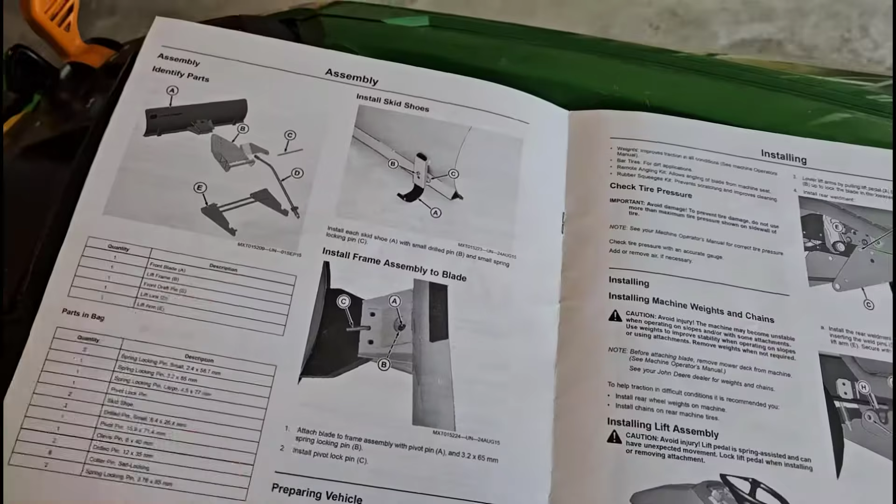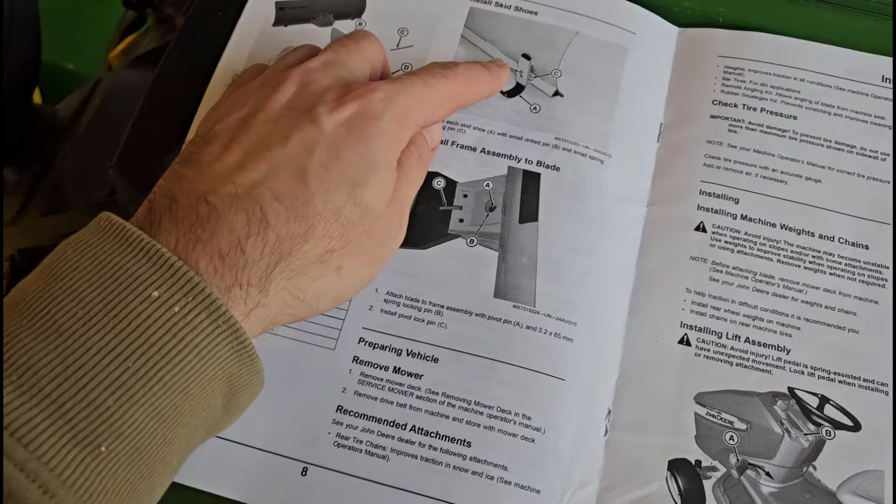Now, throughout this video, I will try to show you the corresponding steps in the manual because sometimes these grainy black and white pictures can be kind of hard to see what's going on. I will note that there are some preliminary steps for the first ever setup and installation that I have already done because I reinstall this every year now. So I'm not going to be showing in this video the steps for installing the skid shoes and installing the frame assembly to blade. You can see I've already done that here.

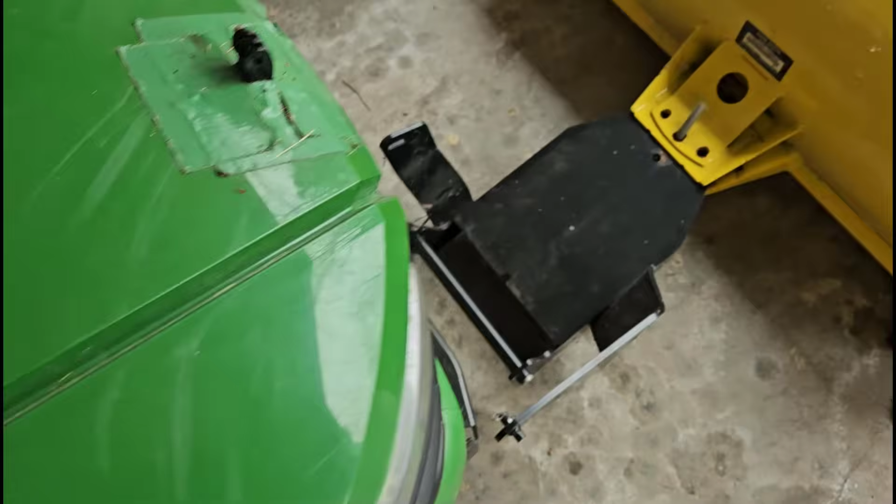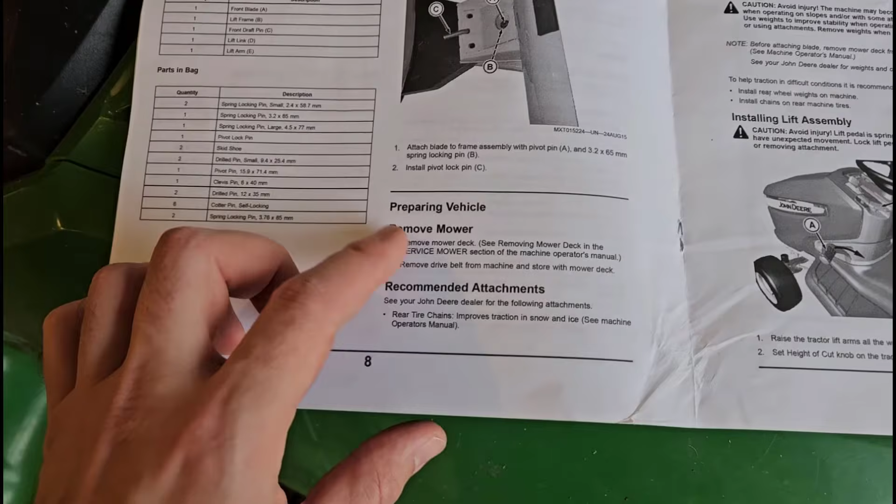And I have also already removed the mower deck. You can see that sitting over there. I have another video on my channel that shows the process of taking that deck off. So if you need to do that first, go check out the link in the description for that video.

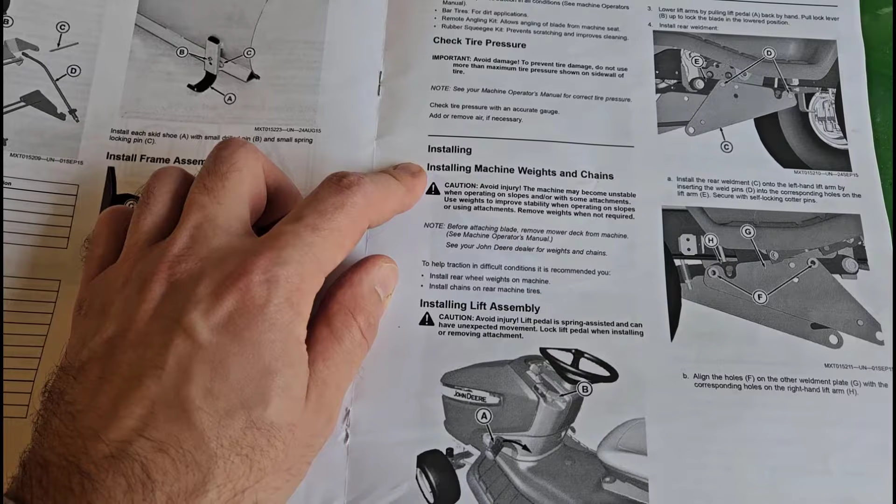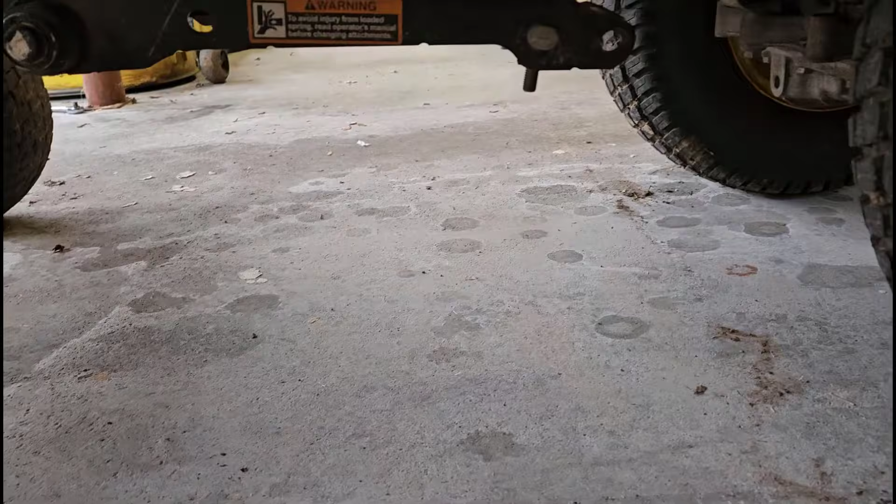Here, we're going to get started with the section of the manual for installing the blade itself. Again, we're going to skip tire chains and weights and get right to the part about installing the blade. So, step one, we're going to raise the tractor lift arms all the way up and set the cut knob on the tractor to the lowest position. So the lift arms, these black things under here, when you push down on this pedal, that's going to lift those up. When you pull back on the pedal, it's going to put them down. So you're going to push on the pedal to lift those all the way up.

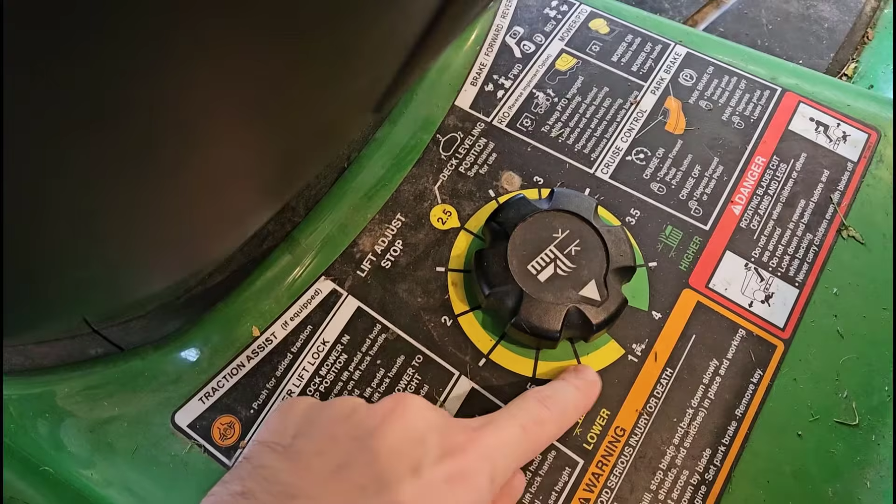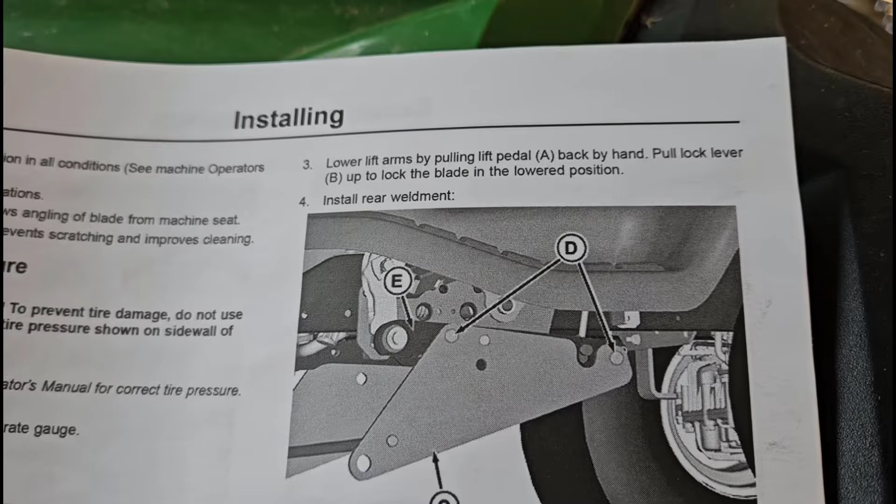Make sure your lift knob is set to the lowest position, which if you just removed the mower deck is probably already done. And then lower the lift arms by pulling the pedal back by hand and then pull the lock lever to lock the blade in the lowered position. So now I'm going to pull this pedal back by hand, and again that is going to lower the lift arms, so pull the pedal back, lower those, and then pull the lock to lock them in the lowered position.

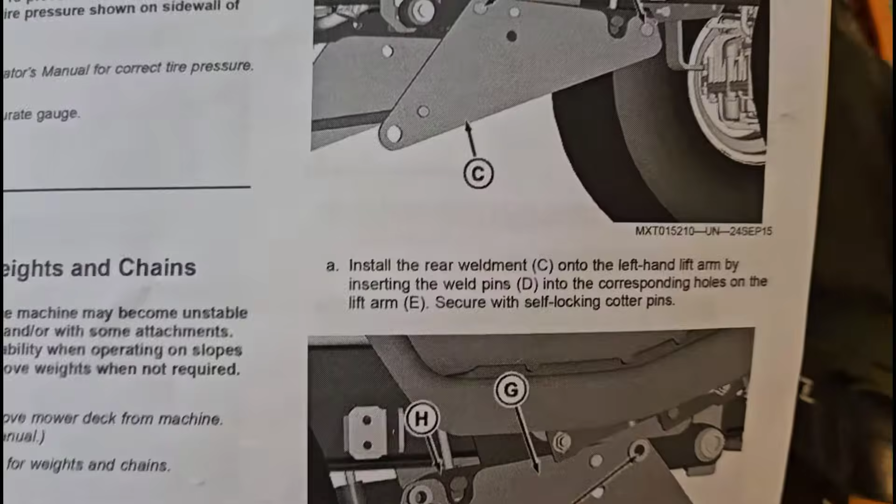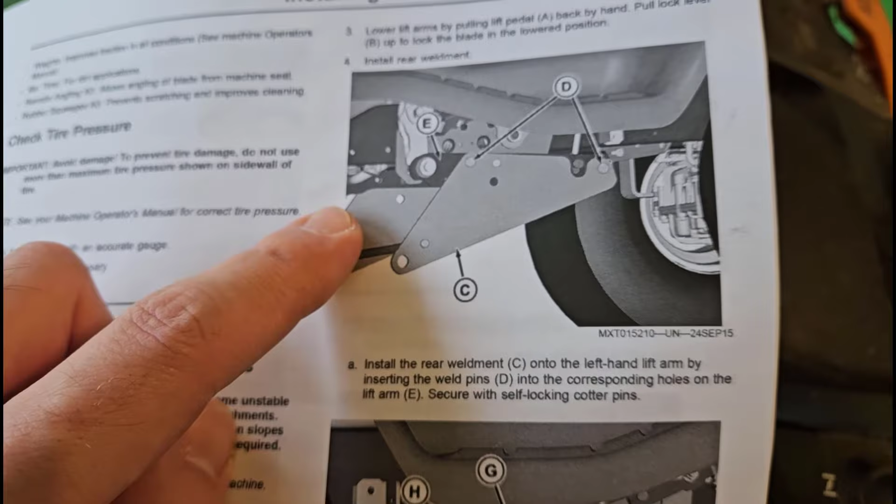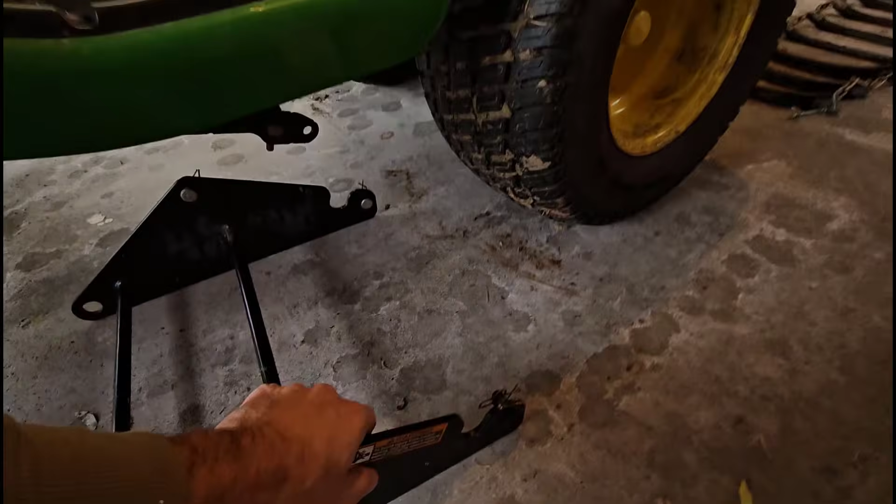Next, we are going to install the rear weldment C onto the left-hand lift arm by inserting the weld pins D into the corresponding holes on the lift arm E, secure with self-locking cotter pins, and that is referring to the picture above that step in the manual. So if we zoom out and go down here, the rear weldment is this thing. Make sure you get it oriented properly. Note how one side has a notch. That is going to go towards the back of the tractor.

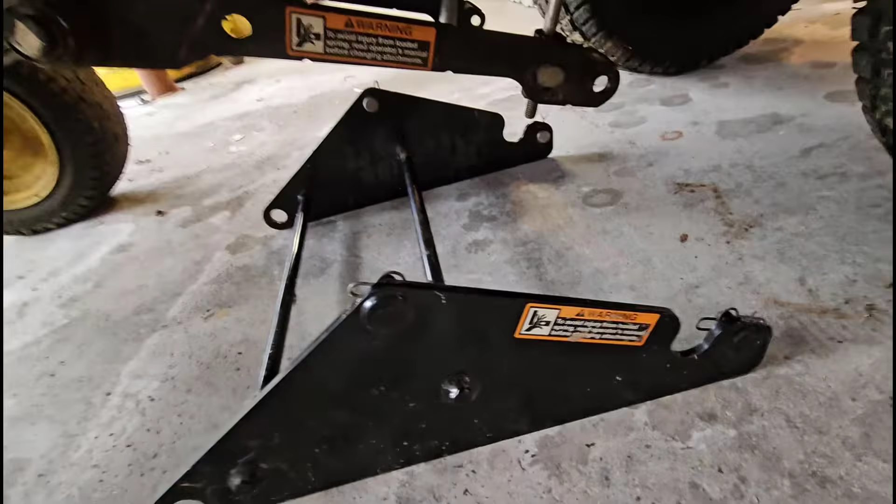And if we slide that under here, you can see how these pins with the self-locking cotter pins, let me see if I can refocus to get it a little brighter, are going to line up with these two holes in the lift arm. So I'm going to need to lift this up, get those pins in there, and then put the self-locking cotter pins back in. I'm going to put the phone down and set up my tripod to see if I can show the process for doing that. Alright, let's see if I can show this here.

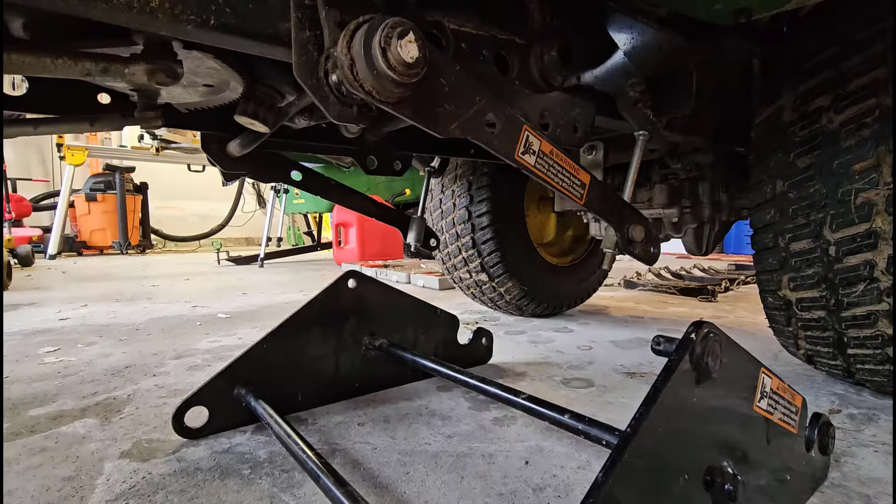So I'm going to lift the weldment plate up, slide those pins through the holes on the lift arm. I'm going to watch what's going on the other side there since I'm bashing into the other lift arm. And then this is a little difficult because now the holes for the cotter pins are on the other side and you can't really see them very well. So you might have to kind of use your fingers to feel where those holes are and slide these self-locking cotter pins in. So there I've got one almost in.

Smart way to do this would probably be to put some 2x4 blocks or something on the other side to hold this up so it isn't hanging down while you're trying to do this. So I think I'm actually going to pause the video here and go get some blocks to prop that up. So there you see on the other side I just had a piece of scrap wood, so I propped that side up so the whole thing is level while I'm trying to do this. And again, then you just got to reach behind here or maybe even stick your head under there. Okay, there, one just clipped into place.

If you really want, you can stick your head in there so you can actually see what you're doing and see where the holes are, but I am just reaching behind and feeling for them. There's one, almost. There we go. So I've got both of those pins in. This side is secure. Now I'm going to go do the other side.

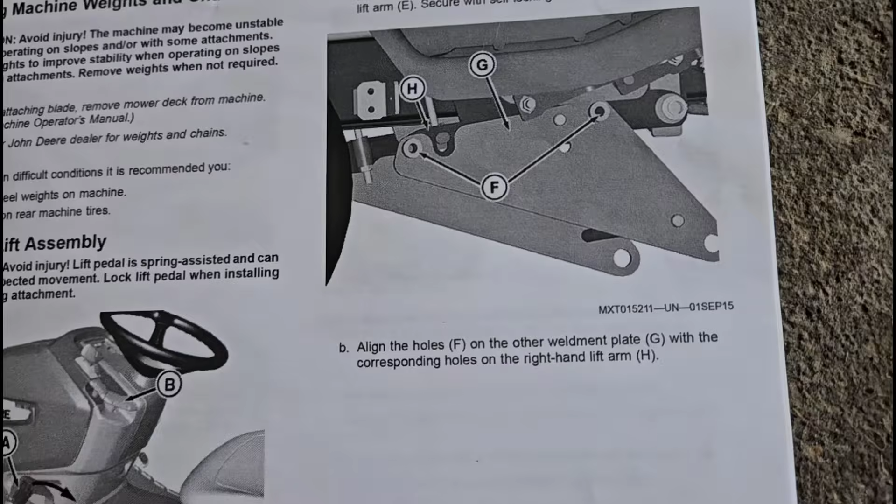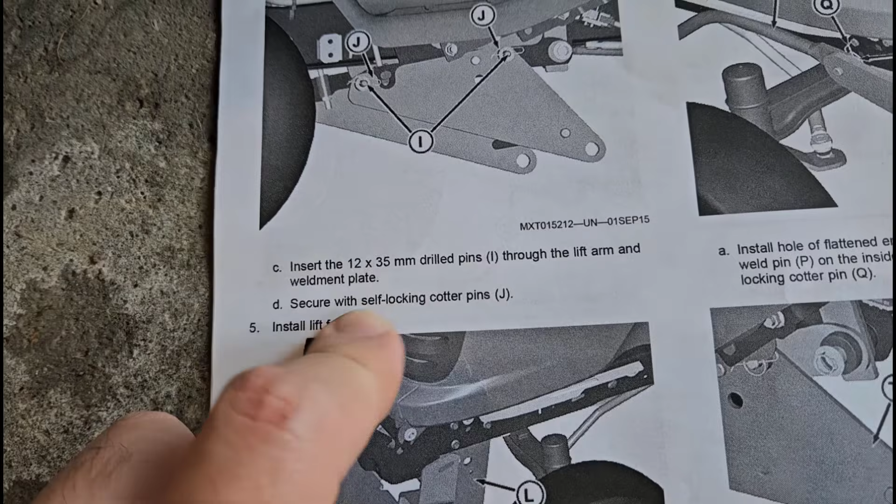So on the other side, we've got align the holes F on the other weldment plate G with the corresponding holes on the right-hand lift arm H. Insert the 12 by 35 millimeter drilled pins through the lift arm and weldment plate and secure with self-locking cotter pins. So that means we've got the weldment plate, we've got the lift arm, we've got these pins that are going to go through those holes once we get them aligned. And then we are again going to lock those in place with the self-locking cotter pins.

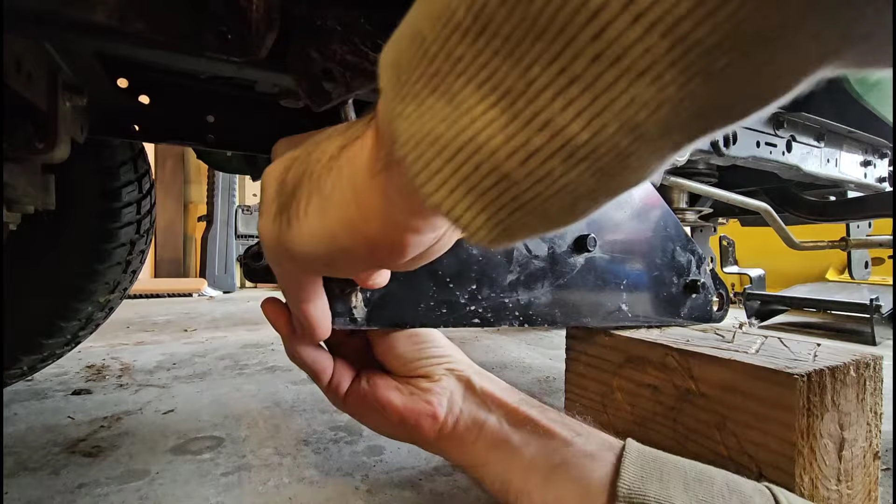So in this case, since you have these separate pins, you have the option of placing them with the holes facing outward towards you to make it a little easier to get that self-locking cotter pin in instead of having those facing inward and being unable to see the holes. So there's one.

And what do I do with my second one? I'm going to pop this in here from the inside. Again, now the hole is facing out, so it's easier to get that self-locking cotter pin in. And now we have attached the weldment plate to the lift arms. I can remove a piece of wood, and you can see this is now held up.

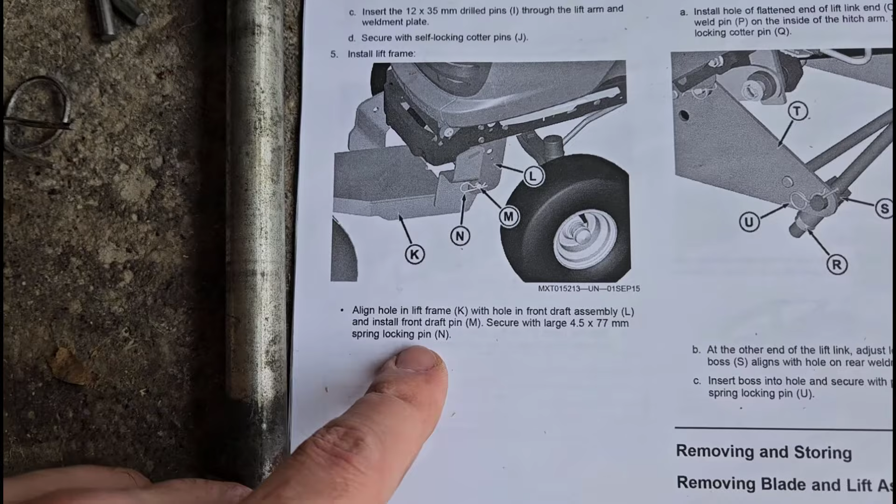Alright, next up we have step 5, install lift frame. Align hole in lift frame K with hole in front draft assembly L, and install front draft pin M, secure with large 4.5 by 77 millimeter spring locking pin N.

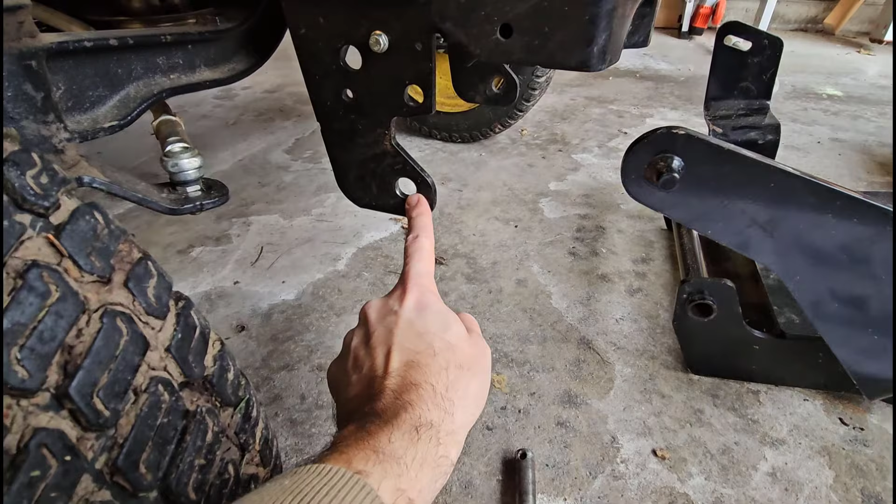So that means we are going to take the lift frame, if I zoom out, which is this thing, and we're going to align that hole with this hole on the front draft assembly. You can see there's a corresponding hole on the other side. We are then going to install this gigantic front draft pin all the way through those holes and lock it on the other side with this spring locking pin.

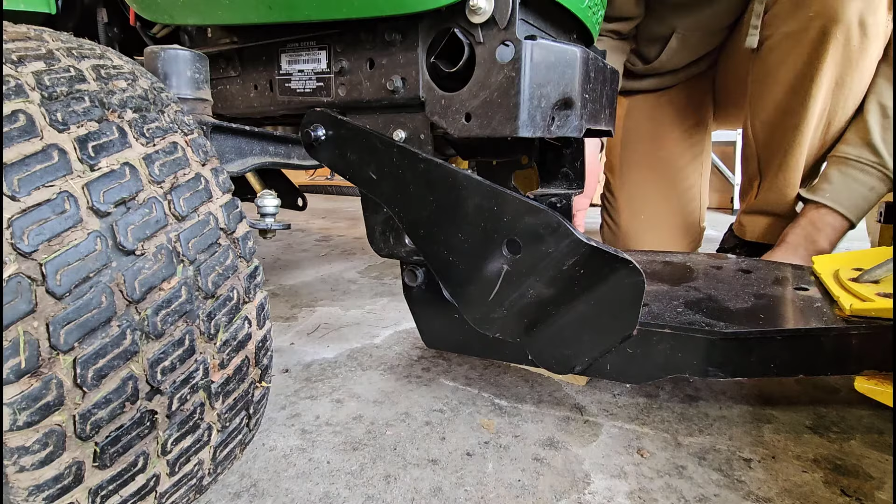Now, this step can be a little difficult to do alone. You might want some scrap wood, again, to hold this up, or some help from another person. Be careful not to drop this on your fingers, but I am going to lift this up, get those holes in line. Oops, as I bump my tripod here.

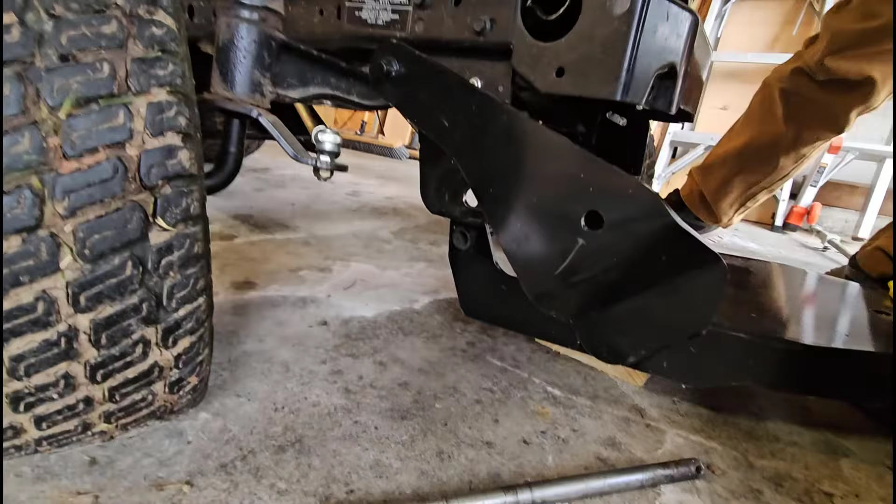And here is an interesting problem. You see that this pin is so long that it actually hits the front tire when I try to put it in. So I am going to turn the steering wheel to the right. Double check and make sure I still have a good view on the camera here. Now I can lift that up, get that pin the whole way through.

Need to make sure that the holes are aligned on the other side as well. So you can see that got stuck with about an inch left there. I need to go check. Yep, I can see how the holes are a little misaligned on this side. Adjust that and just kind of keep wiggling until you get it the whole way through, or maybe, there we go.

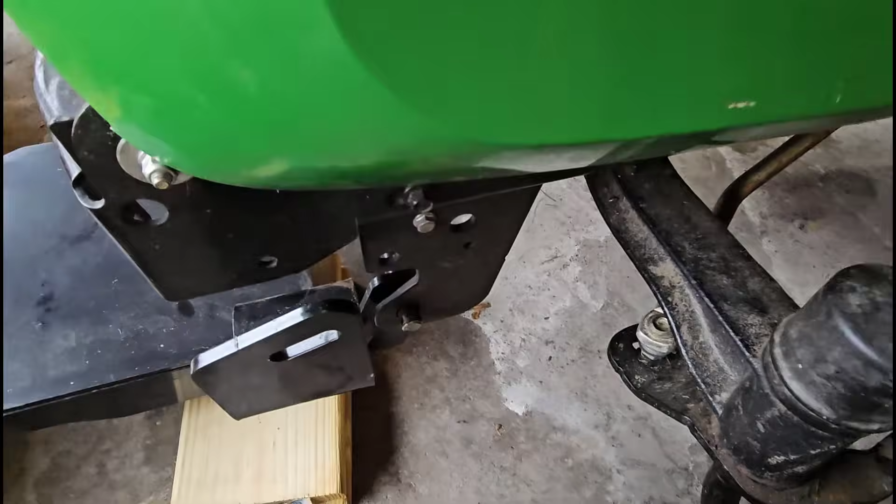Okay, so you can see here, if I zoom in, that pin came through on the other side, and then I'm going to use this spring pin to lock that one in place. There we go.

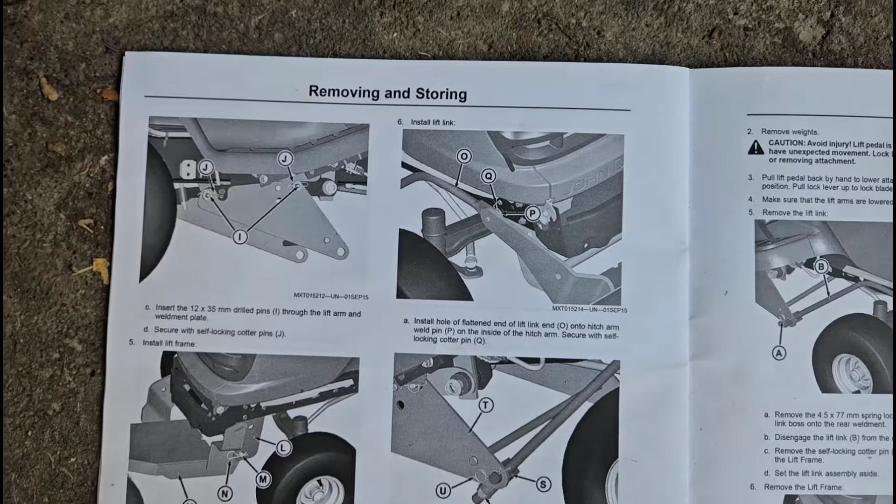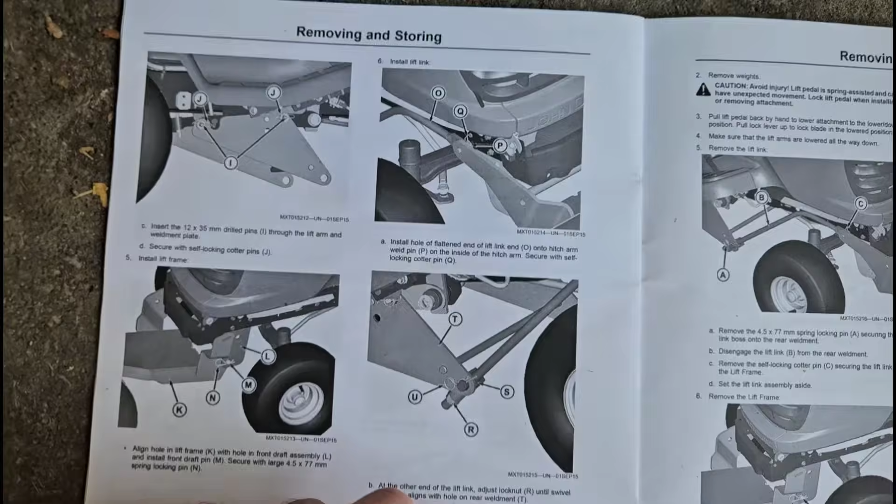Finally, we have installing the lift link. So we are going to install hole of flattened end of link end O onto hitch arm weld pin P on the inside of the hitch arm. Secure with self-locking cotter pin Q. At the other end of the lift link, adjust lock nut R until swivel boss aligns with hole on rear weldment. Insert boss into hole and secure with provided 4.5 by 77 millimeter spring locking U pin.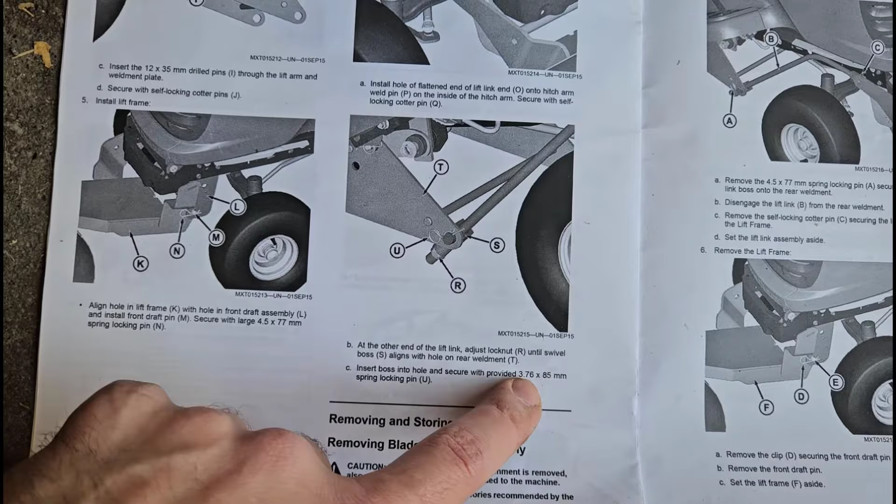So the lift link, we zoom out, is this thing. We are going to take this, oh, got really dark, let me see if I can refocus there, and attach it to the inside of this part here. That's a little hard to show, and then the other end is going to attach back there, and that's what is going to enable you to lift the plow up and down when you push the pedal.

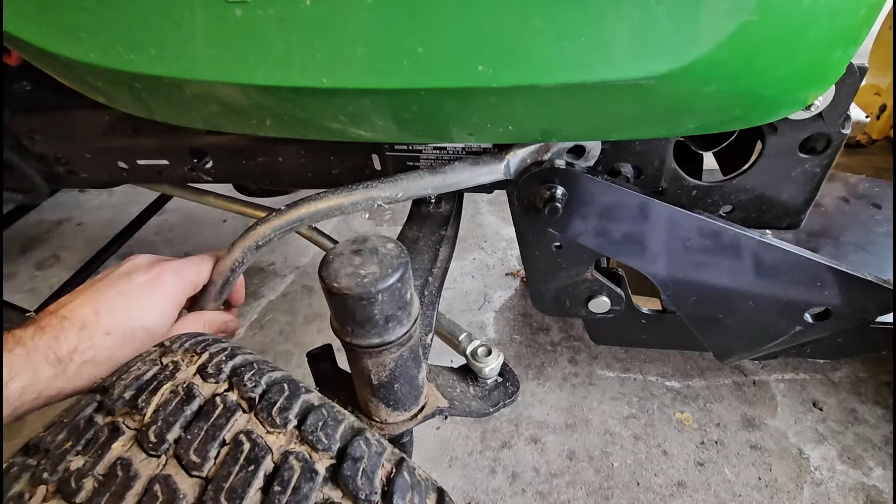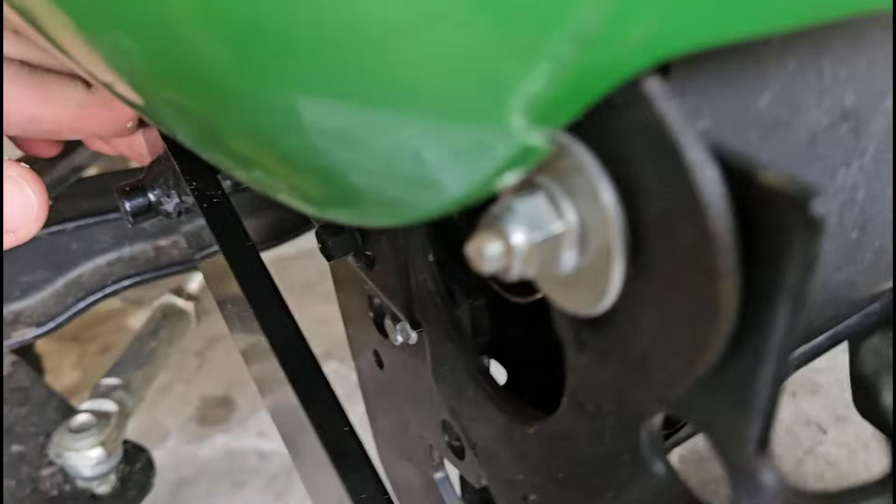So I'm going to try and zoom in here. This is my least favorite part of this entire process, and I don't know if I'm even going to be able to show this on the camera. So install hole of flattened end of lift link. So this is the flattened end that has a hole onto hitch arm weld pin on the inside of the hitch arm. So on the inside of this arm, if I can even get the camera to focus on that, there is a pin there with a hole in it that this self-locking cotter pin is going to go through.

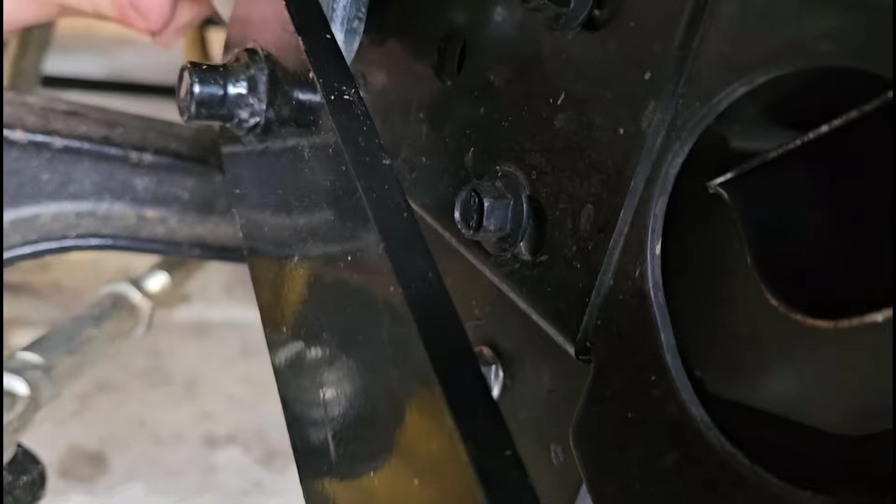And this part, pardon my language, is a huge pain in the ass. Just need to get this in there. It's just kind of hard, easier with two hands. I'm trying to hold my phone so you can see it. Okay, so I got that on. But now, if I can get it to focus again, the camera's not happy about that.

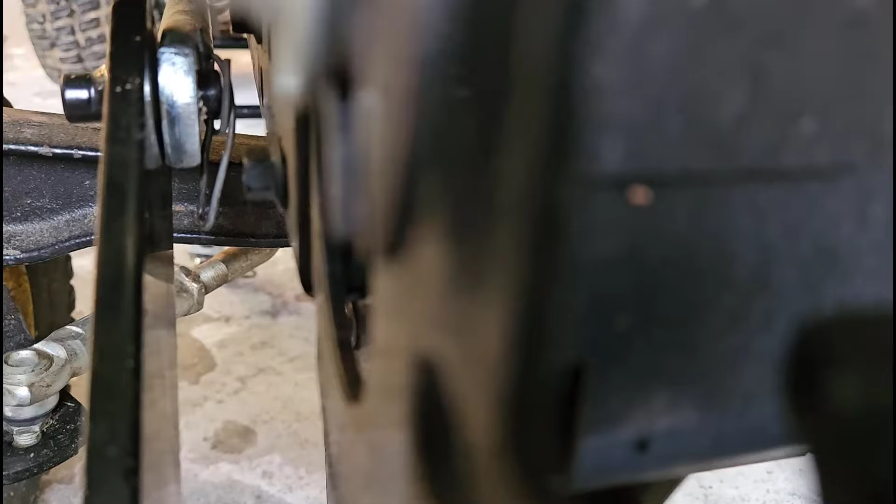You need to get this cotter pin through the hole in there. And this is always difficult just because there's really not a lot of finger space to do this. So maybe some needle nose pliers or something that's going to enable you to push on it to get it through there. I am going to have to put my phone down because it keeps going out of focus anyway. I can't do this with just one hand while I'm holding my phone, and there's not really anything good to put my tripod on. But you got to get this cotter pin through that hole to lock the lift link in place.

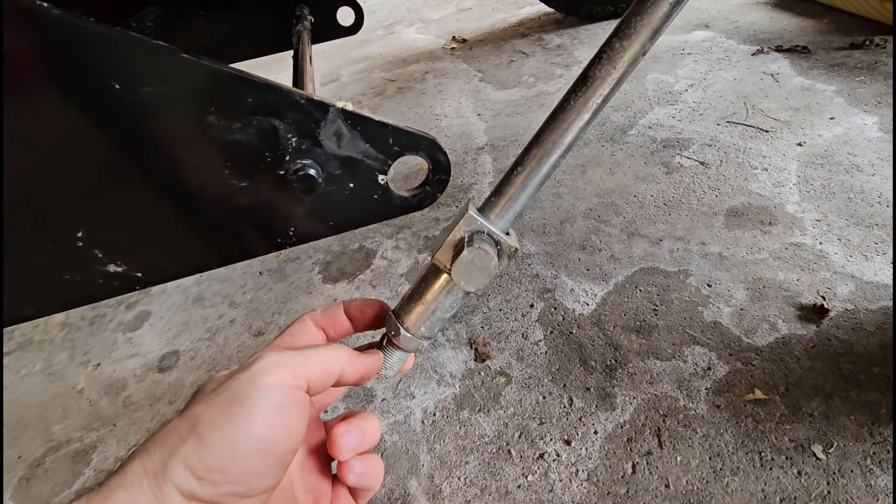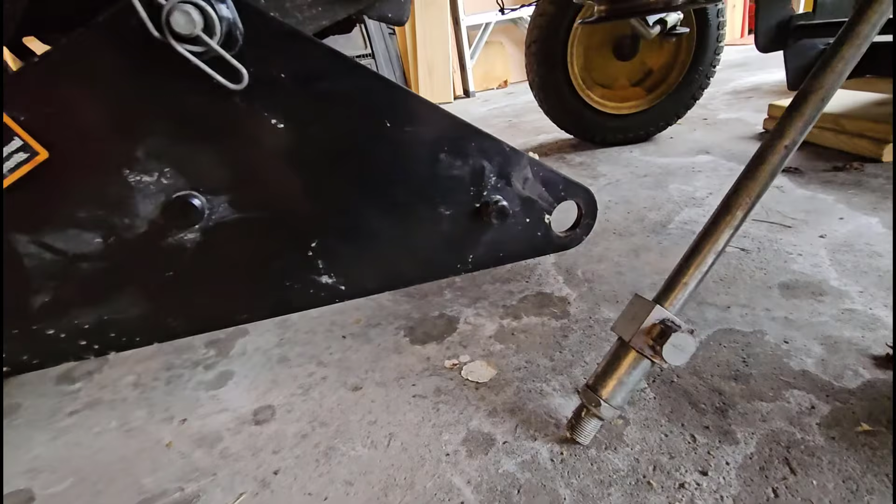Finally, at the other end of the lift link, you can adjust this lock nut as needed to adjust the position of the swivel boss until it aligns with the hole on the rear weldment. So I have already made that adjustment. Oops, my tripod decides to cooperate here. No, okay, tripod doesn't want to cooperate anymore. Come on. There we go.

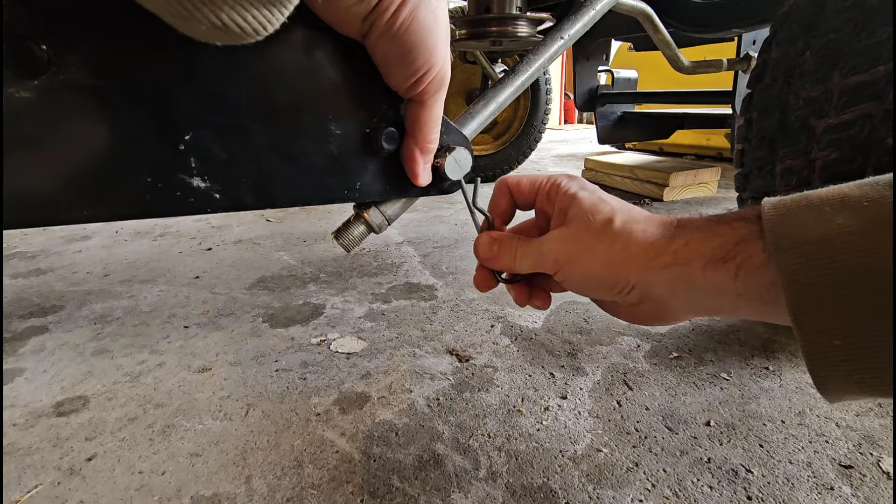That's just going to go into that hole. Gonna lock it in place with this pin. And then you are all ready to plow. There we go. Once you're all done with that, you can unlock the lift, and you can now use the pedal to lift the plow up and down. Happy plowing.